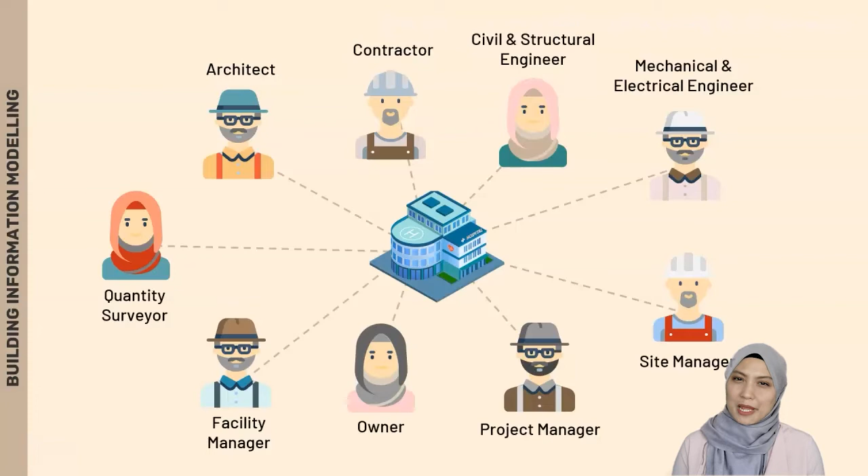In BIM, after the architect produces the BIM model, all consultants and stakeholders use the same model to extract information. Consultants will also collaborate using the same model and produce engineering BIM models. Any updates by the architect will be reflected on the main BIM model and can be seen instantly by others. But you may be wondering, okay, BIM is more organized, but what's wrong with the traditional approach?

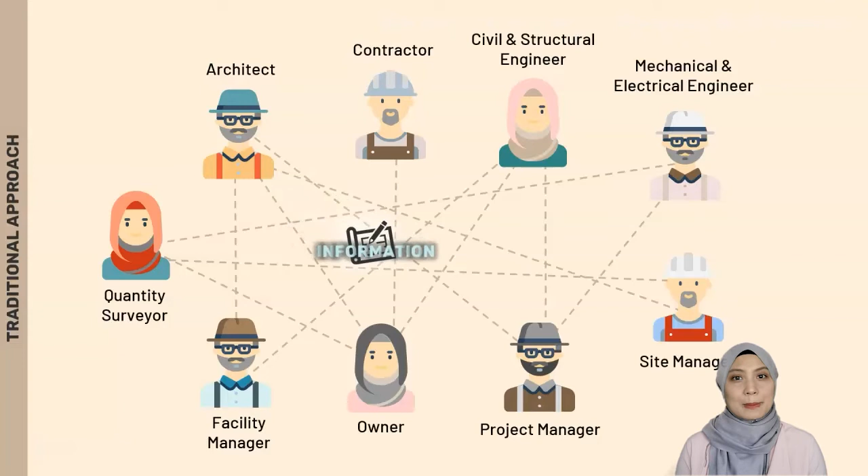In the traditional approach, after the architect completes a design, drawings will be produced in 2D and printed on paper in a certain scale. So based on the produced drawings, engineers will create another 2D drawing, referring to the written details among sheets of other information. The same set of drawings will be sent to the quantity surveyor. The quantity surveyor will count components manually and produce another set of information.

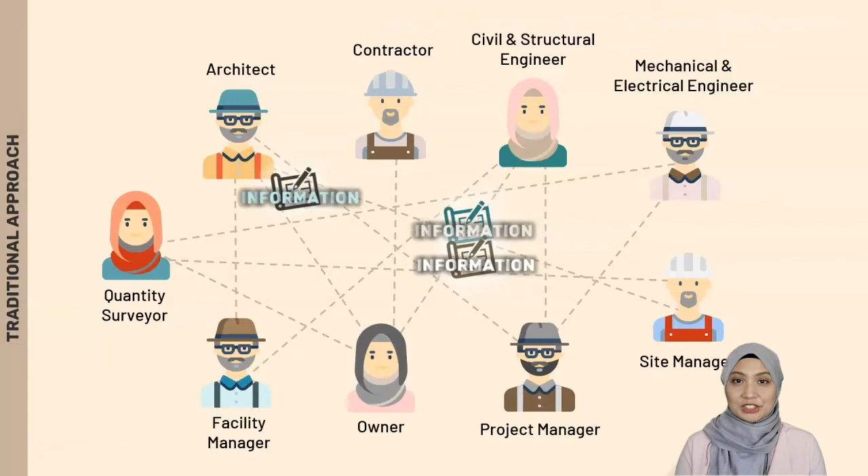To detect discrepancies of data, all drawings and information will be cross-checked manually. So there is a lack of data management in the traditional approach, and information is lost in every step of the process. In a small project, it may not seem important, but in medium to big scale projects, the impact of data error is massive. Here are some cons of a traditional approach.

Higher chance of data loss due to multiple manual amendments from design to completion stage. Harder to find information on printed drawings with crowded and overlapping information. Inability to track who is responsible for the information. Manual calculation for cost estimation. Project modification generates additional time. And poor clash detection between multiple consultants, and most clashes are detected during the construction phase.

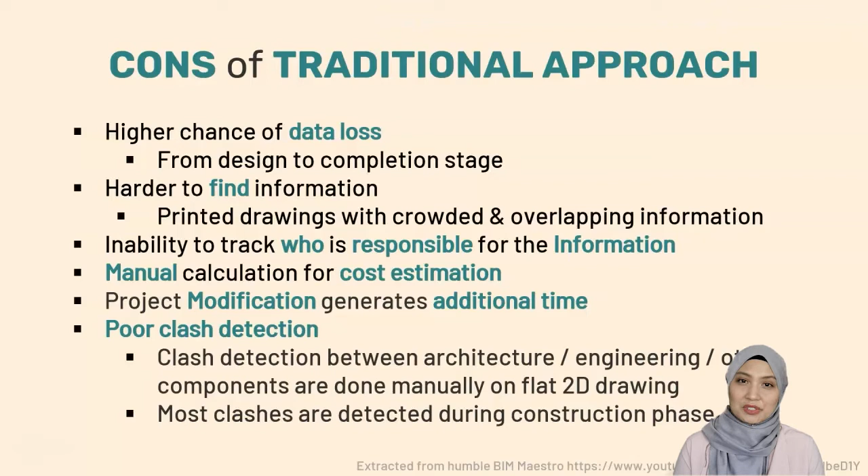So how is BIM different from the traditional approach? Here are 5 key points. The first one is drawing and data. In the traditional approach, drawings are produced in AutoCAD, and these components are actually lines. So in AutoCAD, we are drawing line by line like how we draw on paper, but using a computer. For example, here, we have to draw each view of the window, and if there's any change on the elevation, you have to amend the plan view and the section view of the window too.

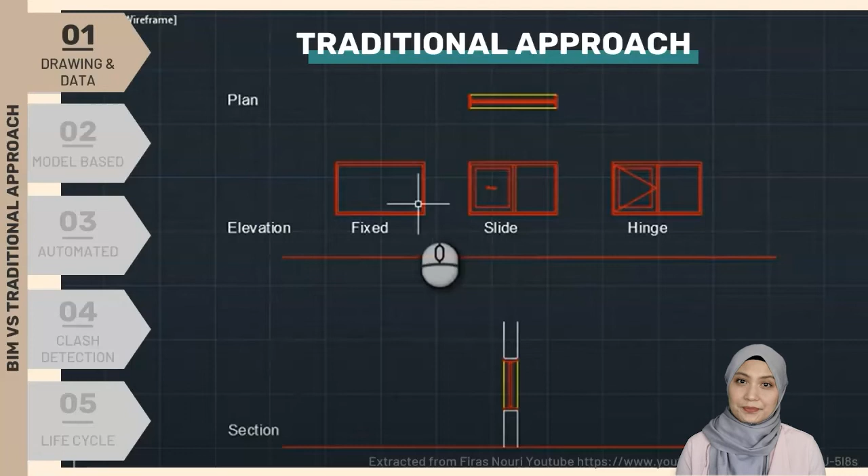In BIM, the component is built as a 3D model, and it is actually a window with sets of information that can be as detailed as materials, manufacturer, model, and phase created. Any changes made to the window will be reflected in other views instantly.

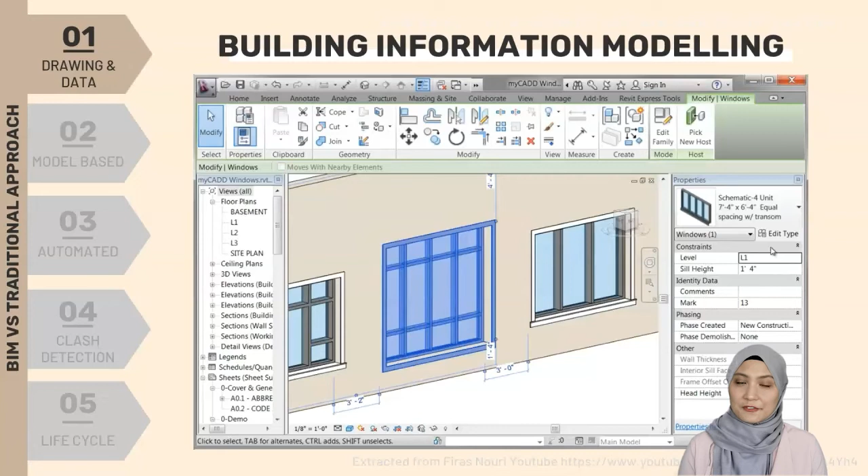Let's take a Lego as an example of how a BIM model is. In the traditional approach, this Lego will be drawn as lines, and we have separate drawings for different views. The 3D produced is more for rendering with no information on the product. In BIM, the Lego is built virtually and contains a set of information. So in one building, there are different sets of information for each building component.

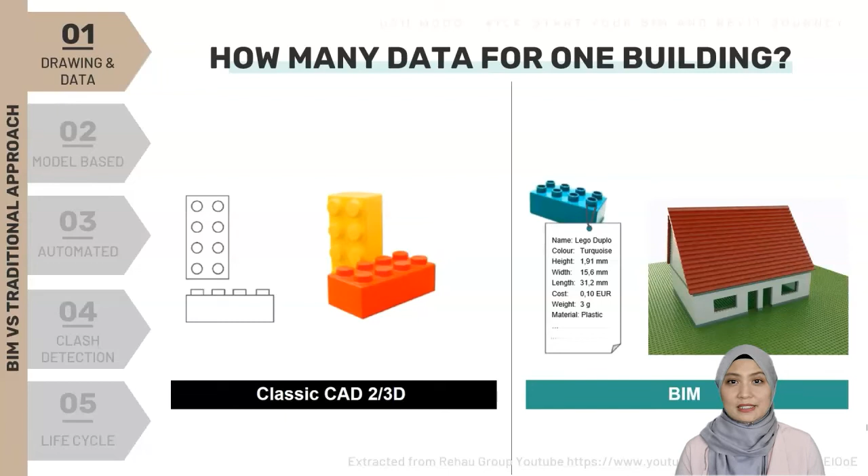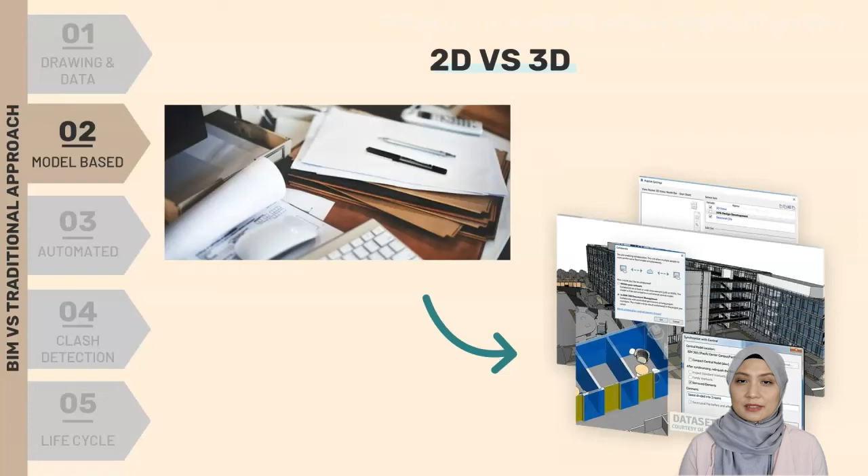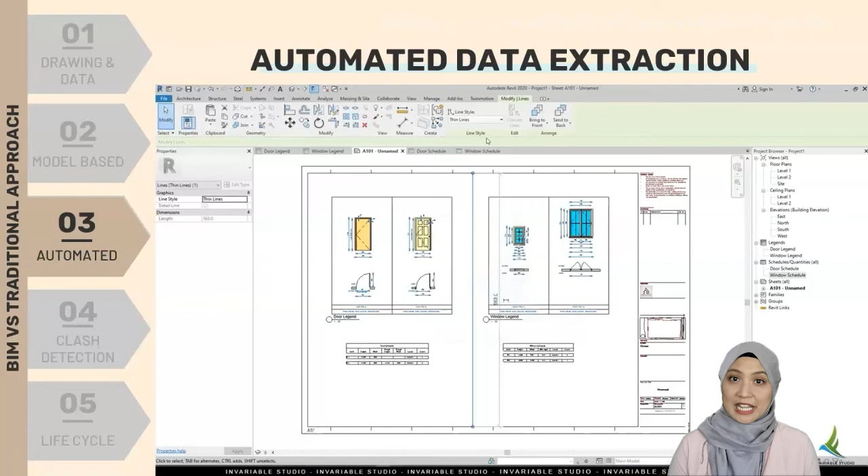The second difference is the traditional approach relies heavily on 2D drawings, either soft copy or printed, while BIM is a model-based platform that allows multiple consultants to collaborate using the same model. The third one is automated data extraction. From the BIM model, we can produce bills of quantity, run solar analysis, schedules, and other data based on needs.

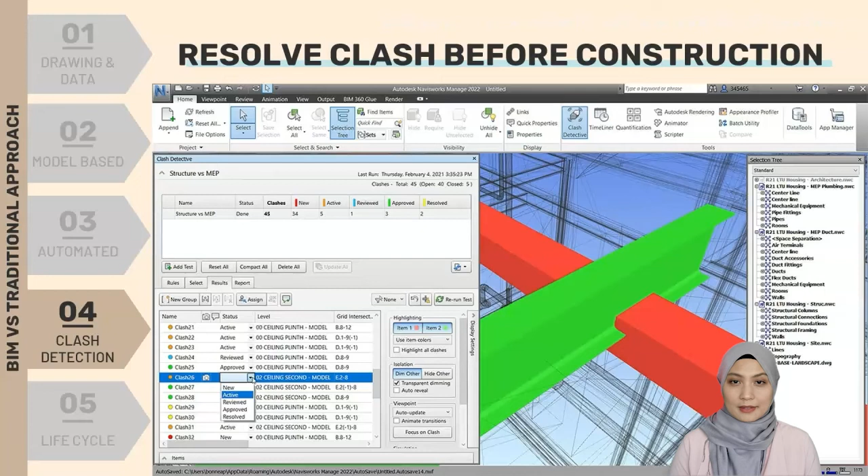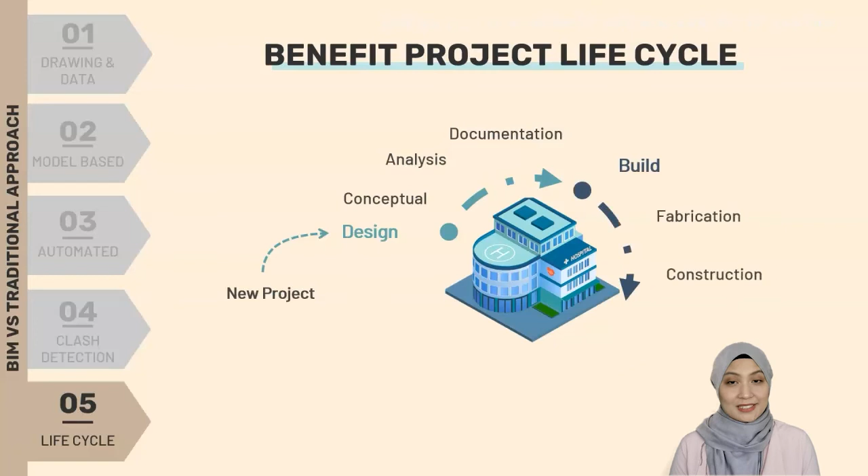The fourth difference is clash detection. Because consultants already built the virtual version of the building in the BIM model, clashes between components can be detected automatically before the construction stage. The last point that I would like to highlight is BIM is involved throughout the project lifecycle, while the traditional approach stops when construction is completed. The same BIM model will be updated based on changes to the building.

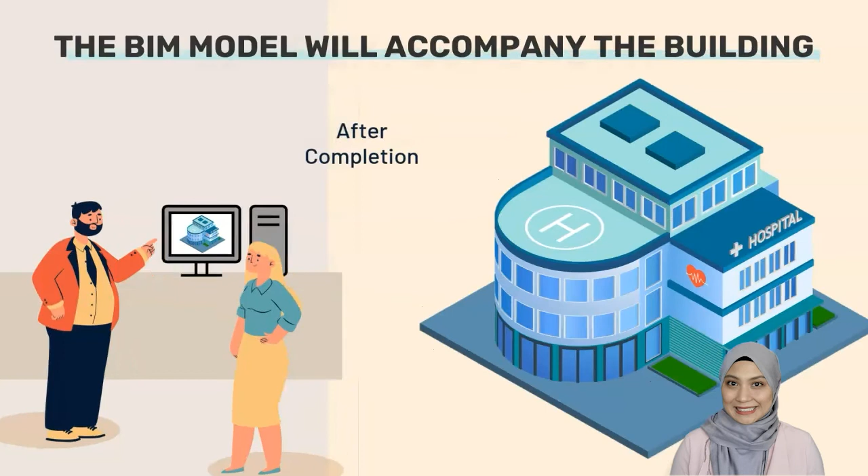In summary, what we build virtually in the computer using a BIM modeling tool during the design phase is what we build physically during the construction phase. And after the building is completed, the building model will be used for operation and maintenance. In the next lesson, we will start to explore Autodesk Revit, one of the BIM modeling tools.